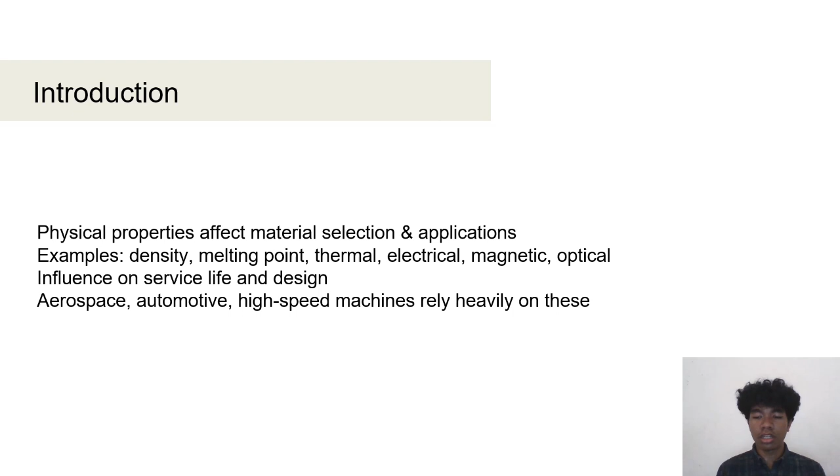Industries like aerospace, automotive, and high-speed machinery depend heavily on the correct balance of these properties to ensure safety and efficiency. Okay, next. Density means mass per unit volume, usually expressed in kilograms per cubic meter. Another related term is specific gravity, which compares a material's density to water. Density is especially important when looking at strength-to-weight and stiffness-to-weight ratios.

That's why lightweight materials such as aluminum, ceramics, and composites are so common in aircraft and cars. At the same time, high-density materials like lead or tungsten are used where extra weight is useful, such as counterbalances and weights. Figures 3.1 and 3.2 show this relationship, where titanium and aluminum stand out as ideal aerospace materials, in first and second position in the figure of the ratio of maximum yield stress to density for selected metals.

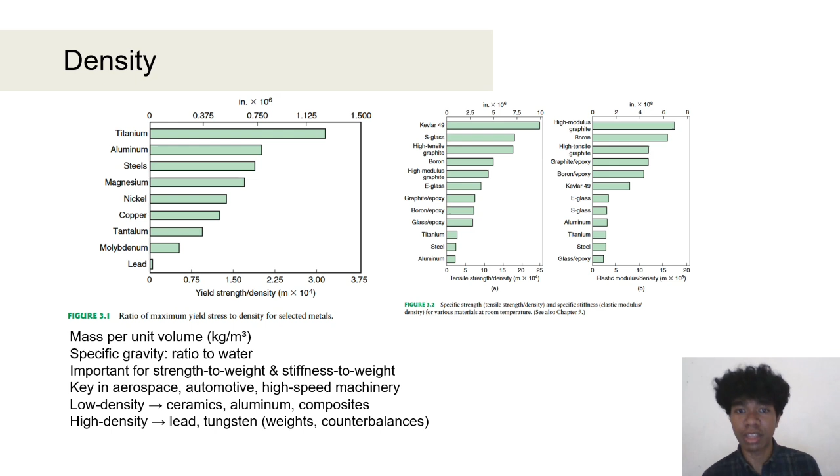And figure 3.2 is the specific strength (tensile strength/density) and specific stiffness for various materials at room temperature. Okay, next. So this is the table of density. Table 3.1 explains physical properties of selected materials at room temperature, like aluminum has a density of 2,700 kilograms per cubic meter, melting point at 660, specific heat of 900 J/kg·K, thermal conductivity 222 W/m·K, and so on.

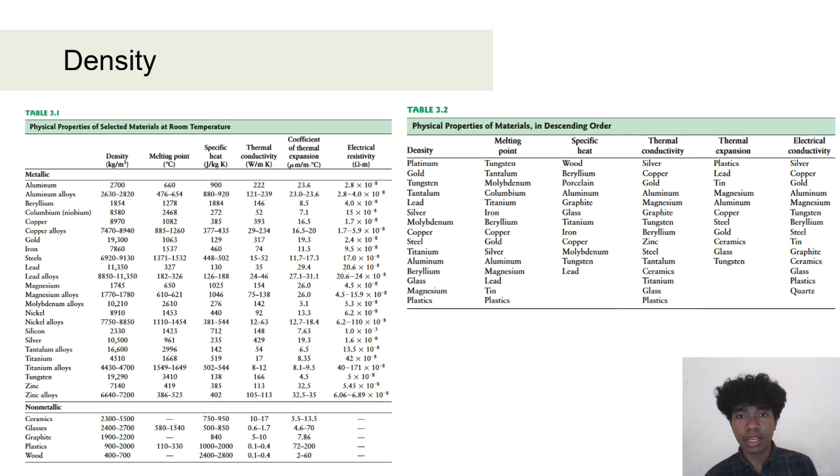And table 3.2 is physical properties of materials in descending order. So there is a ranking of density, melting point, specific heat, thermal conductivity, thermal expansion, and electrical conductivity. Okay, next. Now we go to melting point. The melting point is another important property. Pure metals have a sharp melting temperature, but alloys melt over a range. The melting point defines the temperature limit at which a material can safely be used. It also affects processes such as heat treatment, hot working, casting, and machining.

For example, plastics have low melting ranges and are limited to low-temperature use, while refractory metals and graphite can withstand extremely high temperatures. Figure 3.3 shows how specific strength changes with temperature, explaining why composites are so useful in high-temperature environments. Figure 3.3 is specific strength for a variety of materials as a function of temperature. Note the useful temperature range for high-value composite materials: MMC, metal matrix composite, and FRP, fiber reinforced plastic. Okay, next.

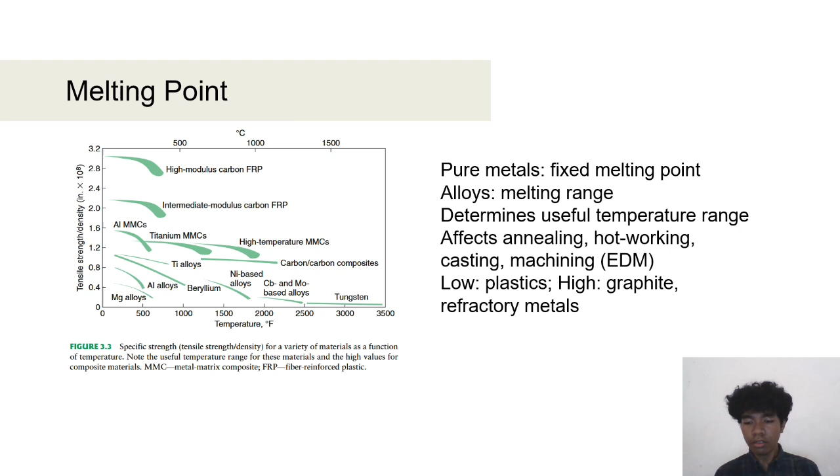So the specific heat. Specific heat is the amount of energy required to raise the temperature of 1 kilogram of material by 1 degree Celsius. It controls how much heat a material absorbs during processing. In machining and forming, materials with low specific heat can heat up quickly, which may reduce surface quality, cause tool wear, or even alter the material structure. Understanding this property helps engineers manage heat in manufacturing operations.

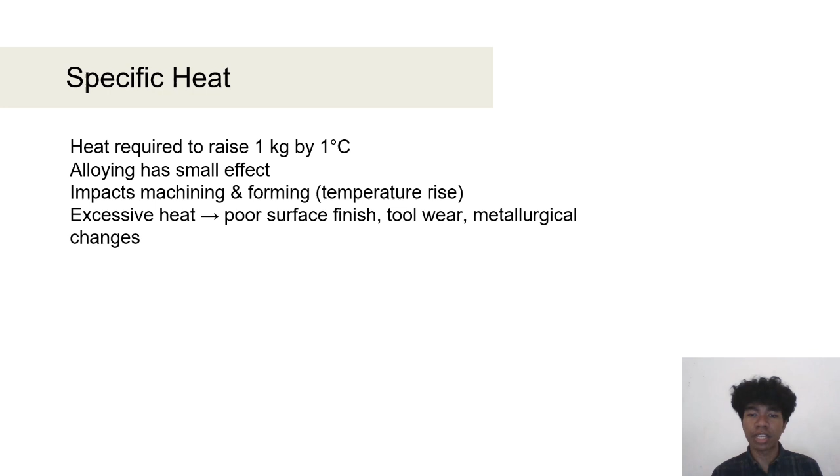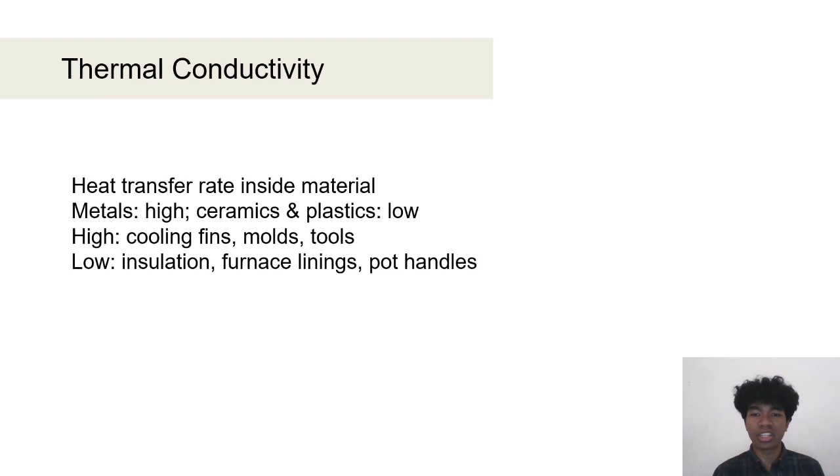Okay, next, thermal conductivity. Thermal conductivity measures how fast heat flows within a material. Metals usually have high thermal conductivity, while ceramics and plastics conduct heat poorly. High conductivity is useful for cooling fins, molds, and cutting tools where heat needs to be removed quickly, and on the other hand, low conductivity is desired for insulation, furnace linings, and everyday items like pot handles or coffee cups. These properties determine whether a material should carry heat away or keep it trapped.

Okay, so next is thermal expansion. All materials expand or contract with changes in temperature, and this can cause problems in assembly. If two materials expand differently, stress may develop, leading to cracking, warping, or loosening. Engineers must consider this in electronics, coatings, and machinery. One common solution is to use shrink fits, where parts are heated or cooled to fit together tightly. Another is to use special low-expansion alloys, such as Invar and Kovar, which are designed to remain dimensionally stable with temperature change.

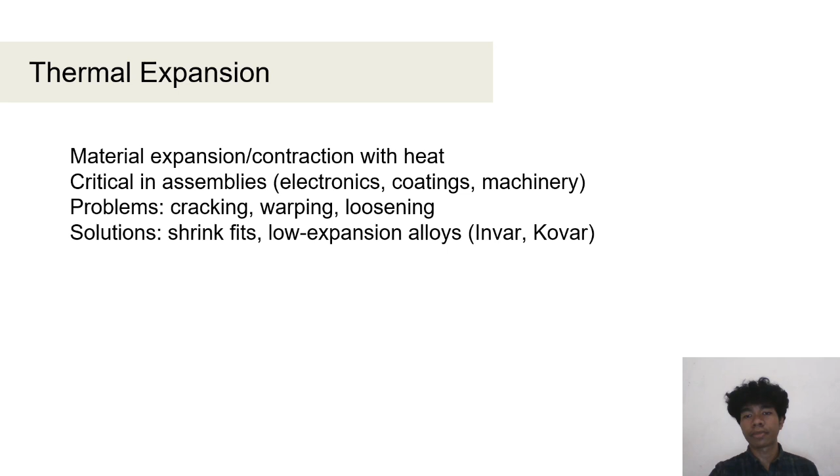Okay, next is electrical, magnetic, and optical properties. Electrical, magnetic, and optical properties open the door to many applications. Metals like copper and aluminum are good conductors, while ceramics and plastics are insulators. Superconductors at very low temperatures can carry current with almost zero resistance, which makes them useful for MRI machines and maglev trains.

Ferromagnetic materials like iron and nickel are critical in motors and transformers. Piezoelectric materials such as quartz can produce electricity when stressed, and they are used in sensors, printers, and microphones. Magnetostriction, which is expansion of a material under a magnetic field, is the principle behind ultrasonic machining. And finally, smart fluids and materials can change their properties instantly under magnetic or electric fields, making them useful in vibration dampers, clutches, and even prosthetic devices.

Okay, next is corrosion resistance. Corrosion is the gradual deterioration of materials, especially metals. It not only weakens structures but also costs industries billions every year. Corrosion can happen in different ways: uniformly across the surface, locally as pits, in crevices, or along grain boundaries. Galvanic corrosion occurs when two dissimilar metals are in contact with moisture, and stress corrosion cracking happens in materials with residual stresses. To prevent corrosion, engineers use coatings, protective films, or rely on passivation. For example, aluminum, titanium, and stainless steel form thin oxide films that protect them naturally from further attack.

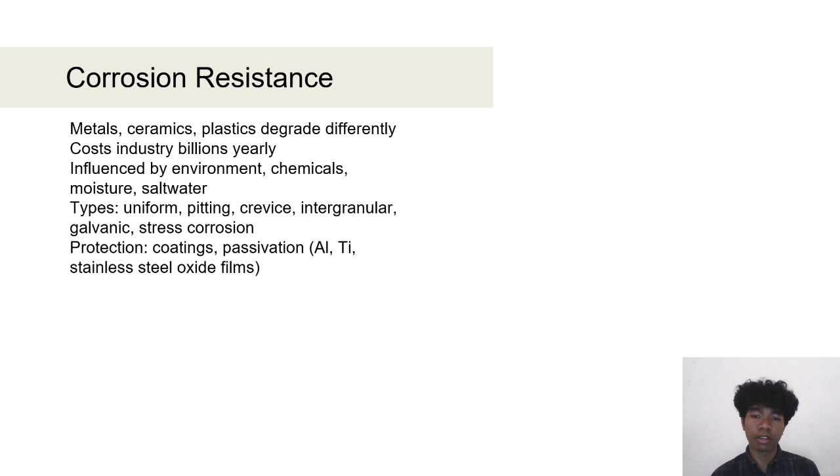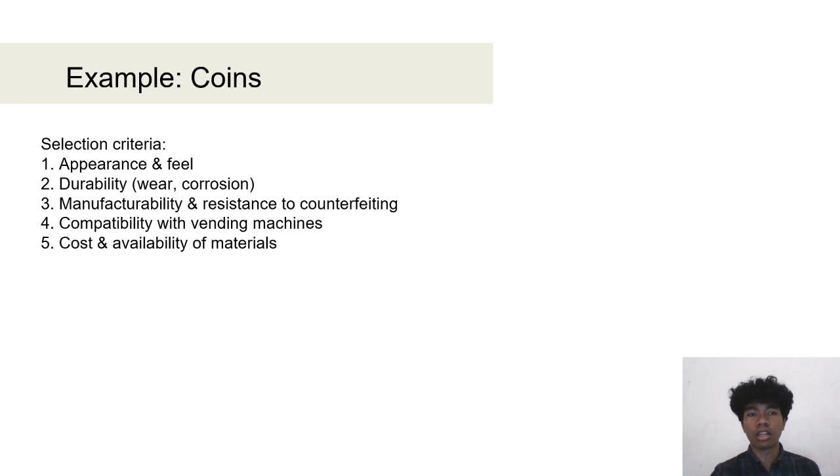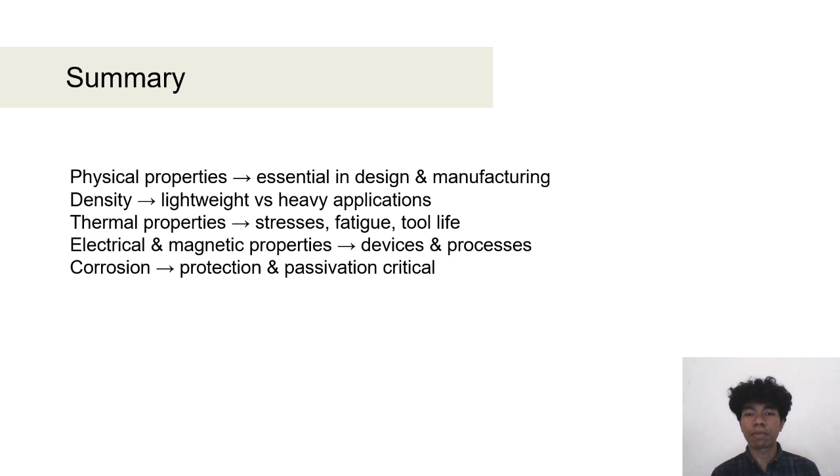And okay, the summary. To summarize, physical properties are essential in material selection, manufacturing, and product performance. Density influences whether we choose light or heavy materials. Thermal properties control fatigue and tool life. Electrical and magnetic properties enable electronics, sensors, and advanced processes. Corrosion resistance ensures long service life and reduced maintenance. By understanding and applying these physical properties, engineers can design products that are safer, stronger, lighter, and more durable.

Okay, this is the source that I used in this presentation: Manufacturing Engineering and Technology by Serope Kalpakjian and Steven R. Schmid. Okay, thank you.